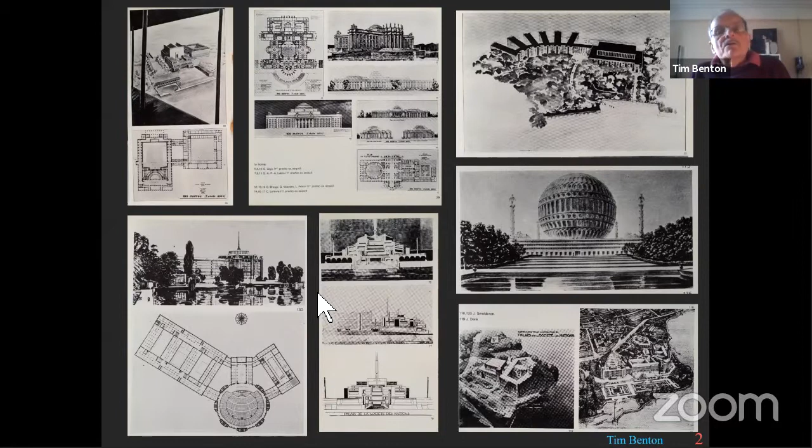But as scientists often warn us, what goes on in the petri dish of an experiment is always affected by the context. And looking at, for example, the international exhibition at Barcelona, what can you possibly say from this exhibition about the international state of architecture, except the dominant importance of the dictator Primo de Rivera in Spain, except, of course, that it was here that Mies van der Rohe designed the Barcelona Pavilion.

Nevertheless, the League of Nations competition is a more diagnostic competition than Barcelona for all sorts of reasons. Many more architects applied for it, and the League of Nations was a truly international problem. I'm going to come back to this in a little bit.

So the story can be summarized briefly. In April 1926, the League of Nations announced a competition to design a palace in Geneva to house its principal functions. A jury of 9 architects—we'll see that 9 is rather an important number in this case—and an opening date in July followed. By the closing date of 27th January 1927, 377 entries from 42 countries by over 1,000 architects had been delivered, estimated at 14 kilometers of drawings.

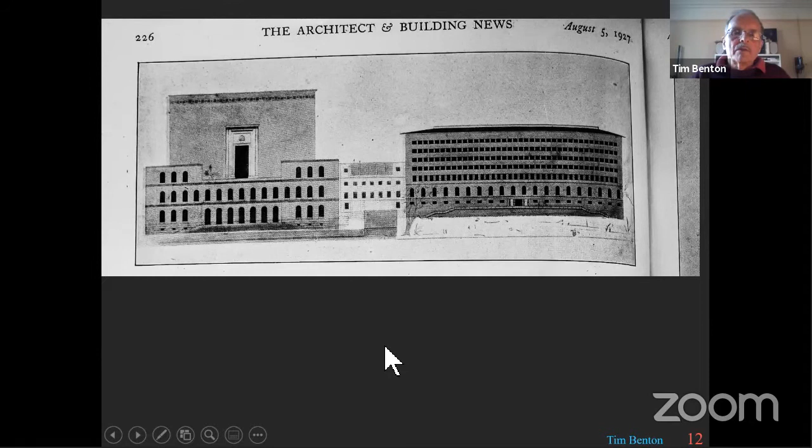And this is another building that he picked out as being international. He liked the project also because of the hierarchic differentiation of the assembly hall from the secretariat, but he particularly draws attention to this non-national quality.

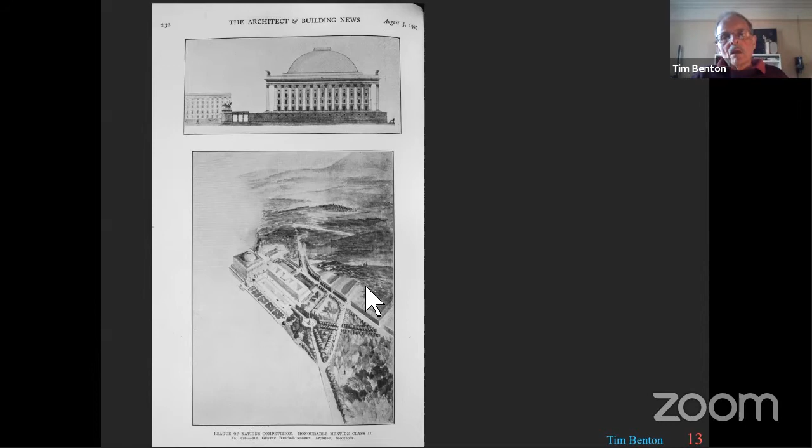So then, the site politics. The jury has certain features which were necessarily political - there had to be a British member of the jury. The British Empire and France were the two key pillars of the League of Nations. Holland was another very good reference because of the Palace of Peace and the idea of international consensus and so forth. The other countries are basically fitting in between these political necessities.

Architecturally, what we have is a group of men who, although they range in age from Berlage to Carlos Gato, did not represent what we would think of as a generation gap, certainly in terms of stylistic or architectural preferences. Berlage and Moser were the most modern of the architects, and they're two of the oldest men on the jury. Carlos Gato was one of the most conservative of the architects, although not actually, as it happens, a Beaux Arts architect particularly.

Muggia, the Italian architect, was actually considered quite an influential figure technically, because he specialized in concrete buildings. He built bridges and other concrete constructions, but his architecture was firmly in the eclectic mode.

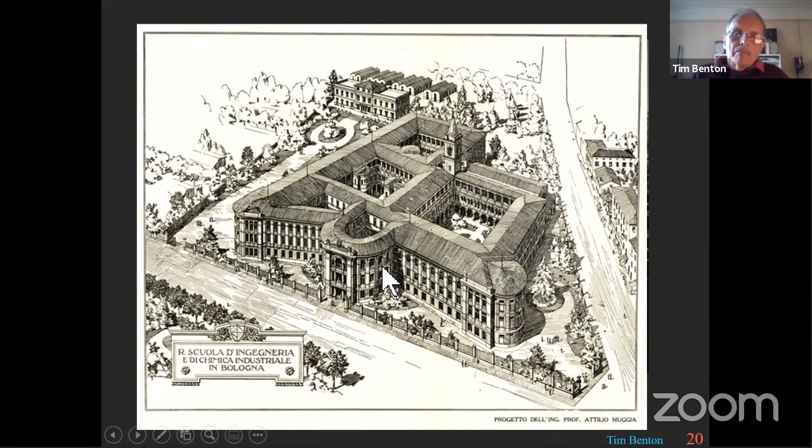And Moser was actually the most modern architect, if you like, in his actual constructions. And this is his Antonius Kirche being built at this time, the time of the jury.

And finally, Tengbom, practicing like Asplund in what the English call the Swedish Grace style of stripped classicism, here using a styler form, but otherwise extremely stripped, and very much part of the Swedish tradition.

So when finally the jury made their decision, instead of choosing one first prize and one second prize and some other mentions, they failed to do this, and they came up with 9 first prizes ex aequo, and then 9 first-class mentions and 9 second-class mentions.

And I said that 9 was a key number, and it won't have escaped you that there were 9 members of the jury. What seems to have happened - and we know this happened, because there's a correspondence between Berlage and Moser which makes it quite explicit - was that in the end, probably due to Lemaresquier's intervention, they decided the only thing to do was to give each member of the jury 1 vote for 1 project.

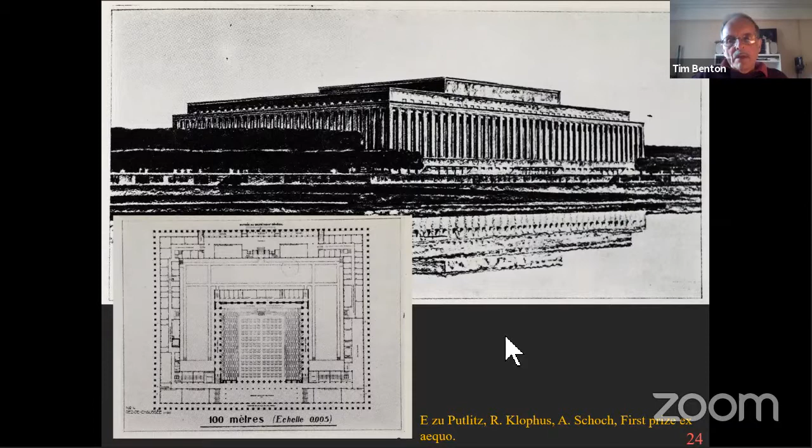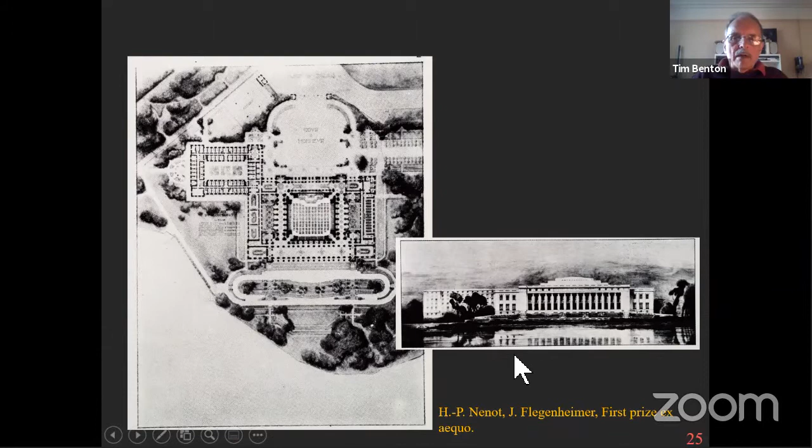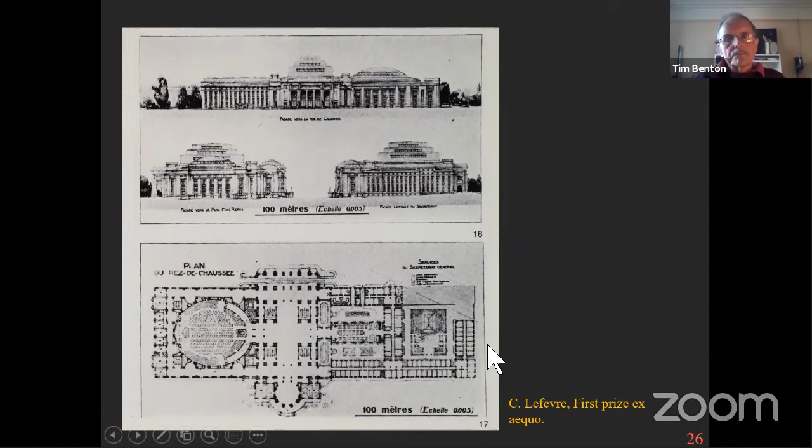Lefevre was a Beaux Arts architect, which again matches the kind of Beaux Arts criteria, but actually turned out to be one of the most expensive of the designs to build, and has a very strange feature that the main central area of the building, which you'd imagine would be the assembly hall, turns out to be a huge vestibule joining the assembly hall and the administrative areas. Then we have Labro, and Labro was Lemaresquier's student, and there's no other reason that I can imagine why it would have been chosen.

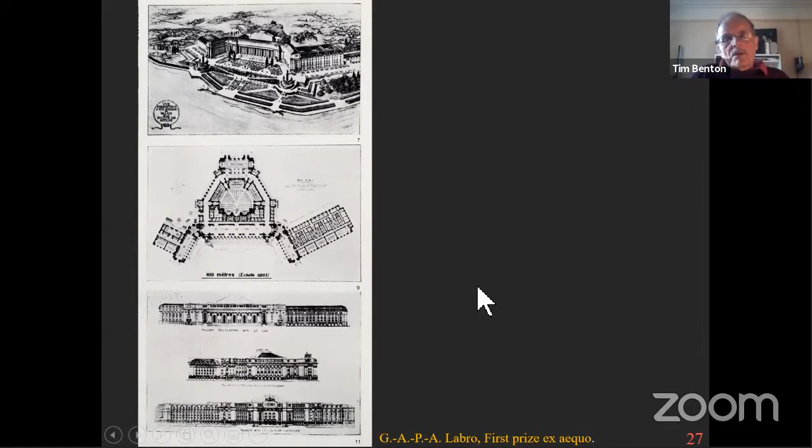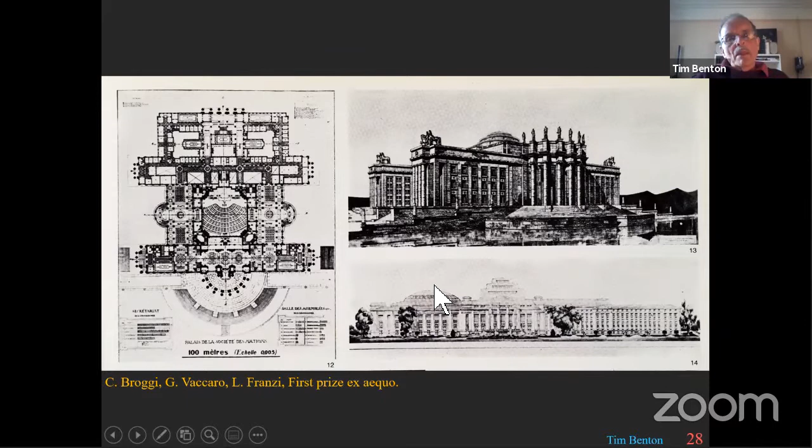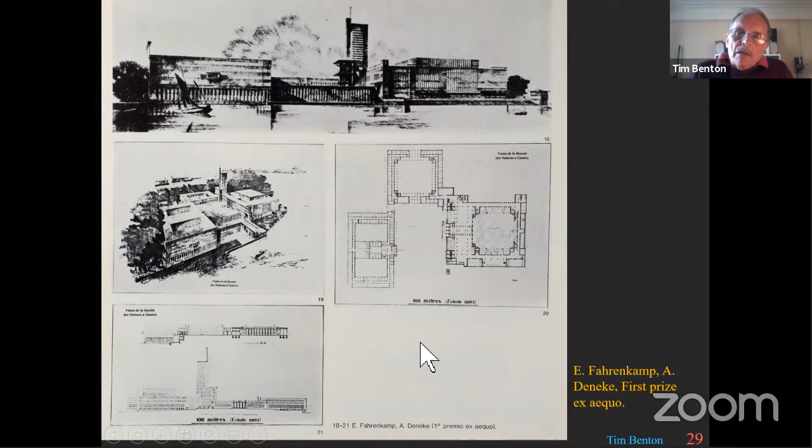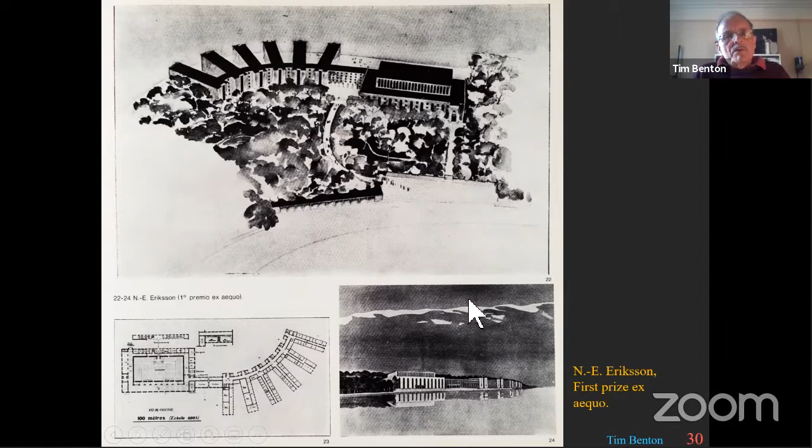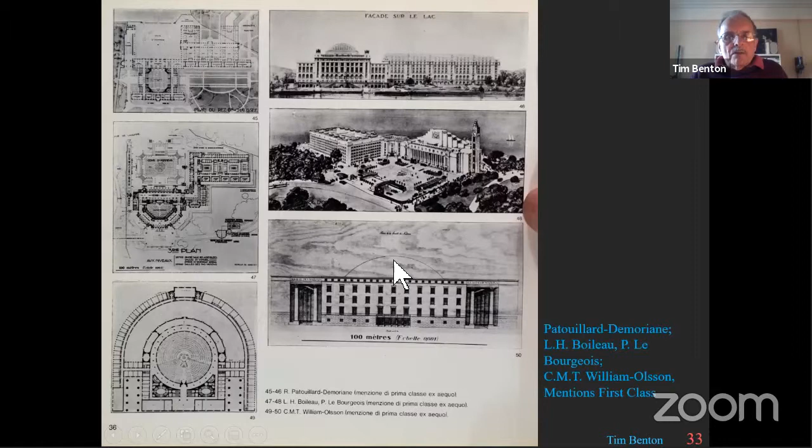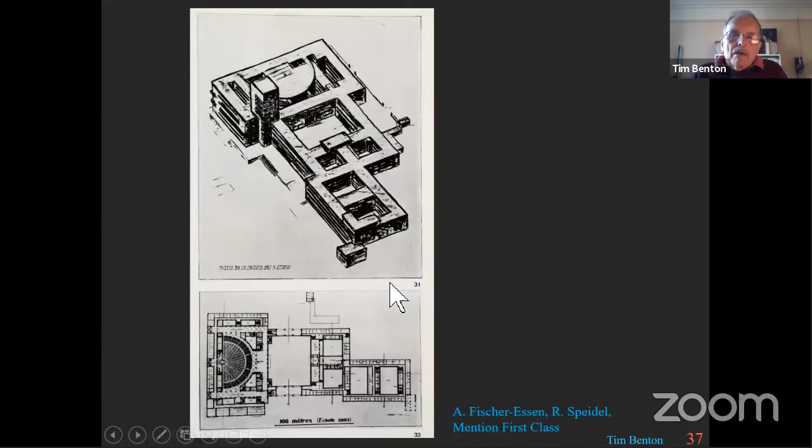And then we can do the same thing for the first class mentions. I'm going to go through these quite quickly. I'm not even going to name the architects, but you get the same idea. It's a mixture between classicism, more or less strict classicism, with the rationalist designs in the middle, and then things which are more modern. This is the second class projects now, classical or rationalist.

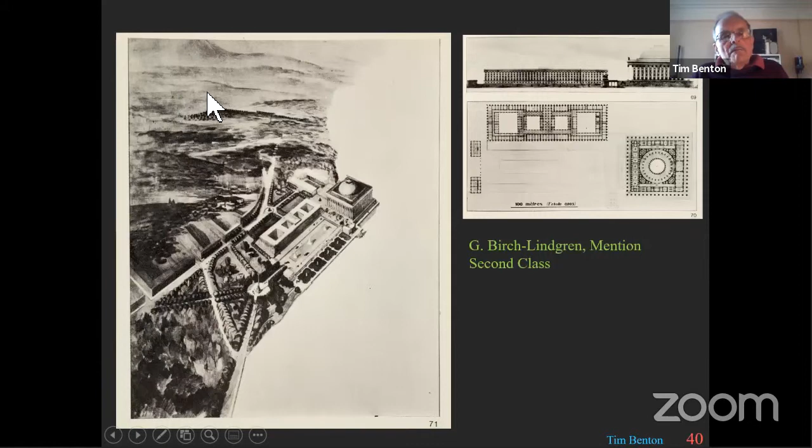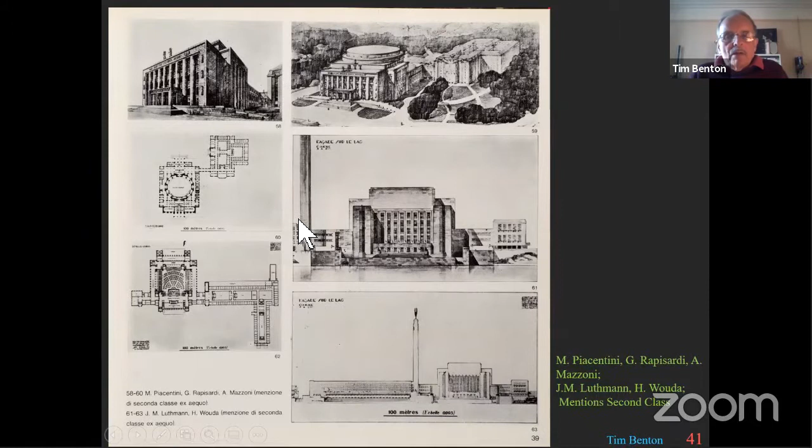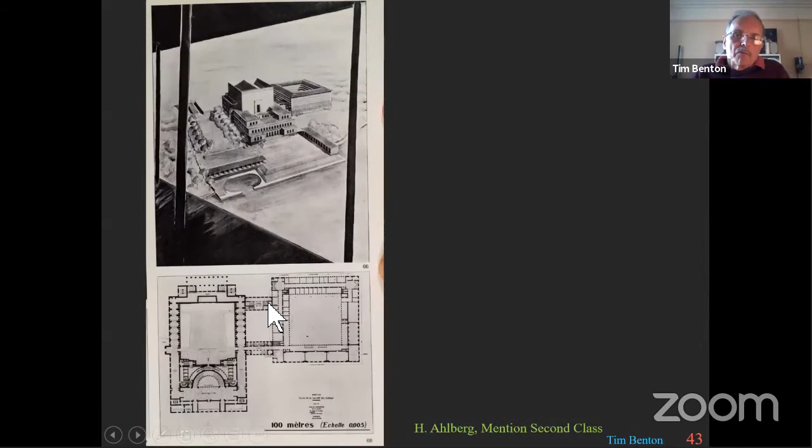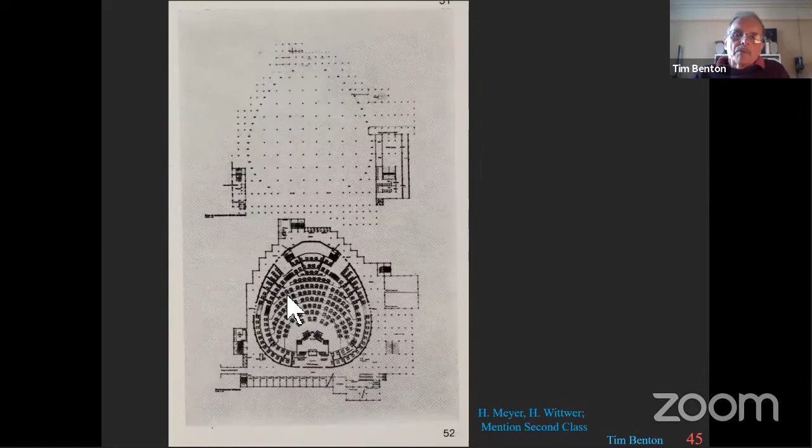And Meyer and Wittwer, who got a second class mention. Now, their project is extremely interesting because it belongs to the class of competition entry which one would say is clearly not designed to win. And this is something actually that happened to Le Corbusier, especially in the 50s and 60s. I remember talking to assistants who worked with Corbusier, who said he was desperate. They would work on a competition entry, trying to follow the rules and everything, and Le Corbusier would make sure that their design could not possibly win the competition by either making it too big, or sending it in too late, or doing something wrong.

And this is part of the whole idea, and it goes back to an earlier period, that a competition is a window to your production. It's not designed to win the competition. It's designed to show your position as an avant-garde architect. So losing a competition and getting into the architectural magazines was a good result.

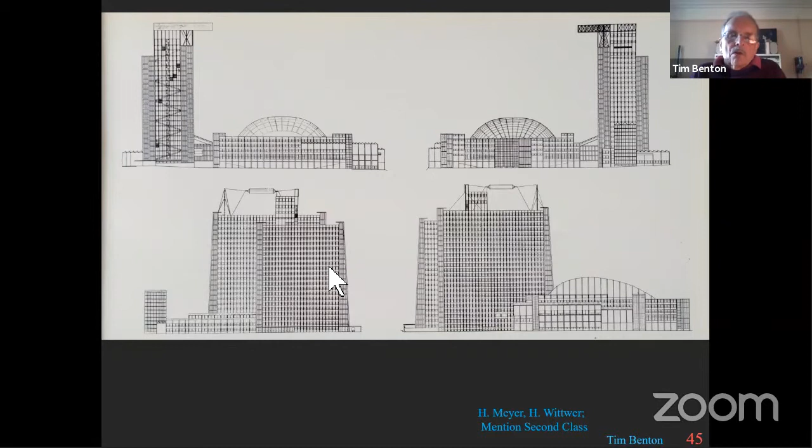So, for example, it's interesting to know why Berlage didn't choose Merkelbach, probably because this was much too office-like a building, and it didn't aim at some nobility. So one of the interesting things here in this section is to say, well, okay, they didn't agree about a lot of things. They didn't agree about style, but the jury probably did agree about some things. And one thing was, like in this case, the need for monumentality, some kind of monumentality.

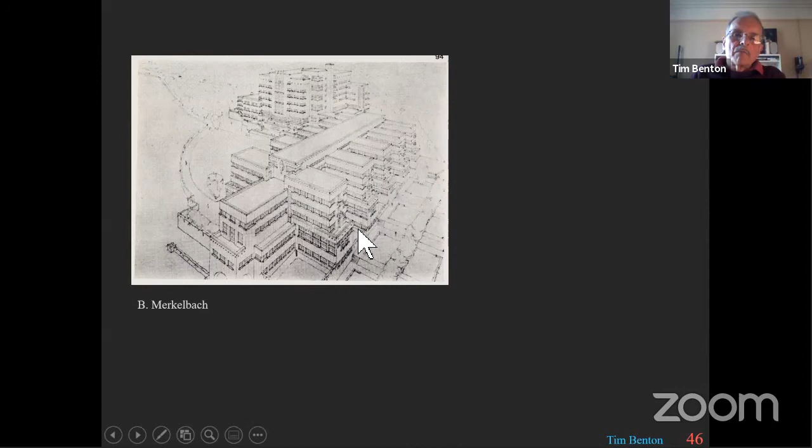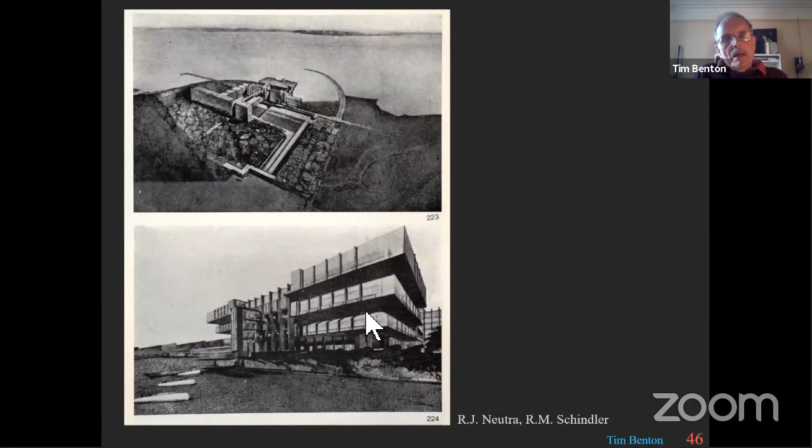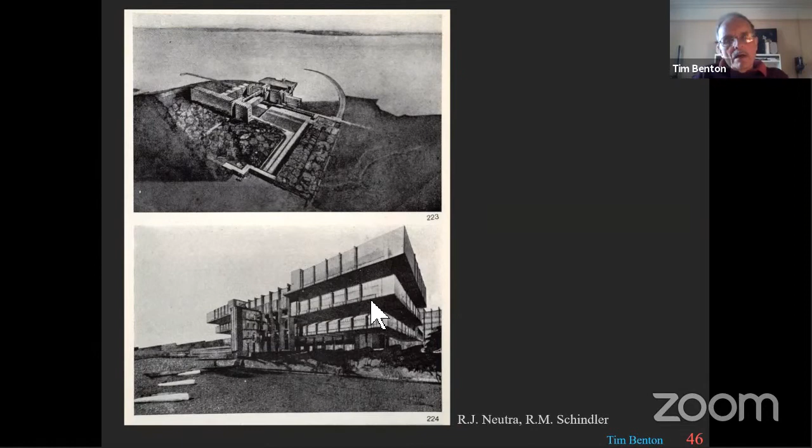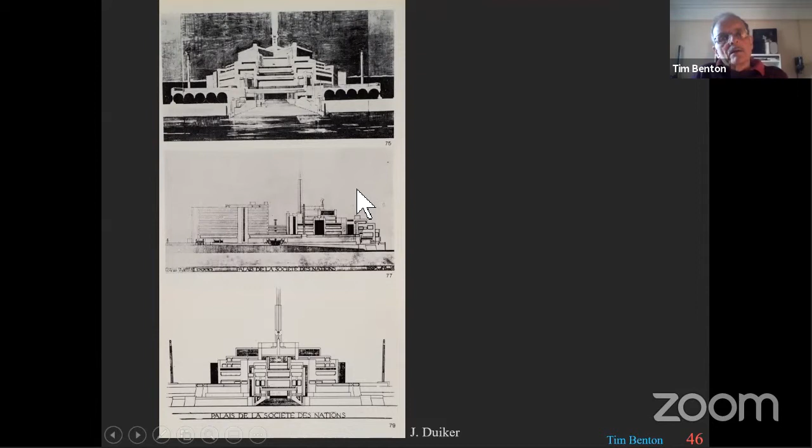And although Meyer and Wittwer get in, most of the other projects make an attempt at monumentality and some sort of international quality. Why didn't Neutra and Schindler get a mention? This is a rather brilliant design in many ways, but again, it's probably to do with the idea of monumentality and the idea of some sort of internationalness. And again, why didn't Berlage go for Duiker, whom he knew very well and worked with? This is again rather a good design, and it certainly has a monumental quality, but it's probably too dominant over the landscape and breaks too many of the rules of the competition, including preserving the trees and the view to the mountains behind.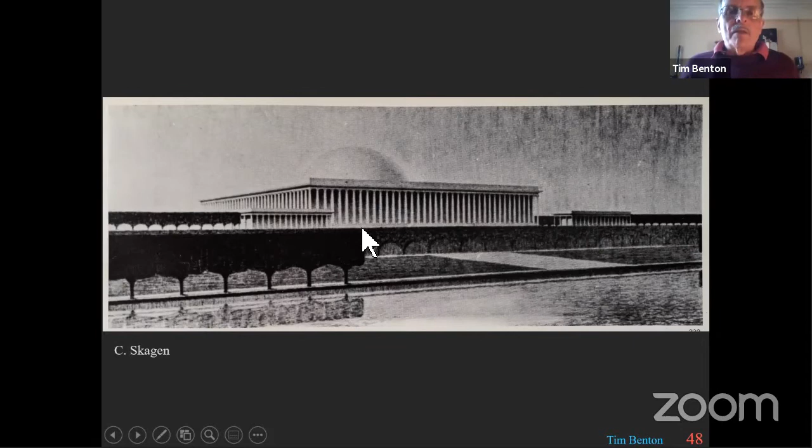So what else did the jury agree on? Well, I think one thing they agreed on, and that's why I showed that, is the old adage that you shouldn't reveal your sources too much. Eclecticism was now a bad term. And even Nénot, as we'll see later on, says that he is against the old things. So it was now no longer possible to be too historicist, to show your sources too much. So this Skagen's version of the Escorial, or the École Militaire, the Escorial more likely, with a bit of Santa Grazia Milan thrown in, is just too historicist. There's too much Hagia Sophia here, and there's too much Juvara here to be acceptable.

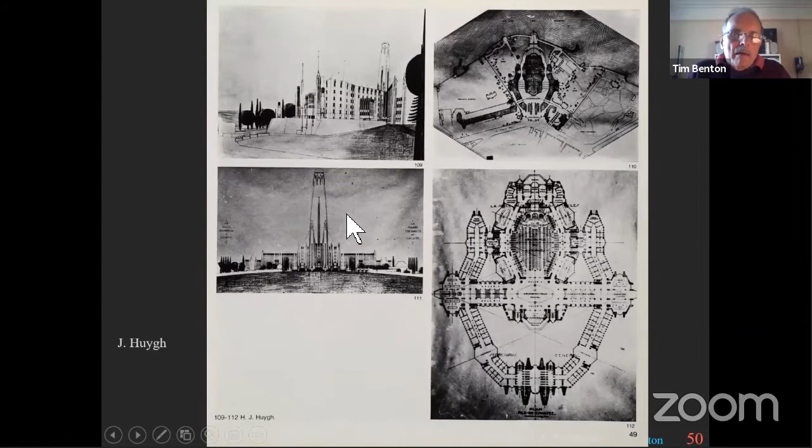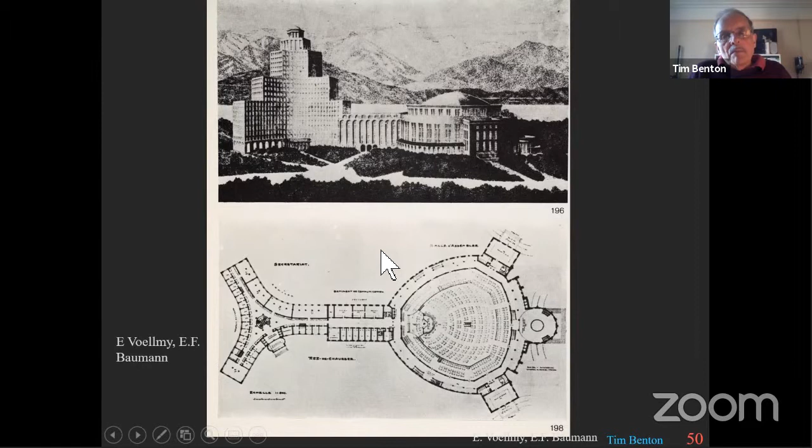Another thing they agreed on was they were all against Expressionism. So Poelzig was out. Huygh's building was out, especially for its plan, which is clearly part of a Stadtkrone type plan. They were against tall buildings, which was a clear understanding of the wishes of the people who set the program. So this project was out.

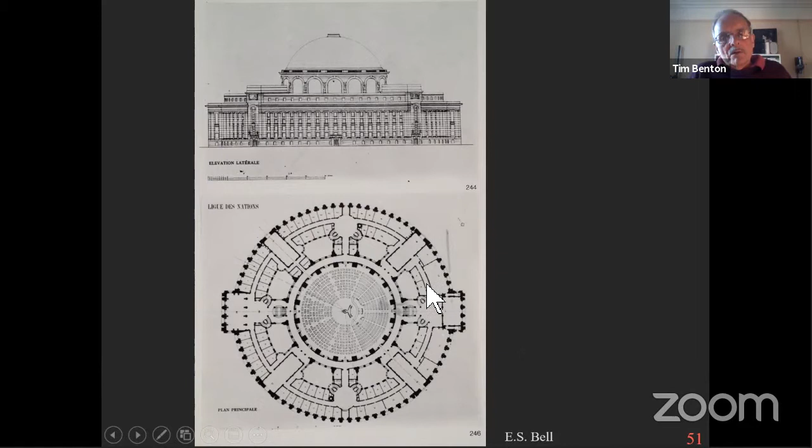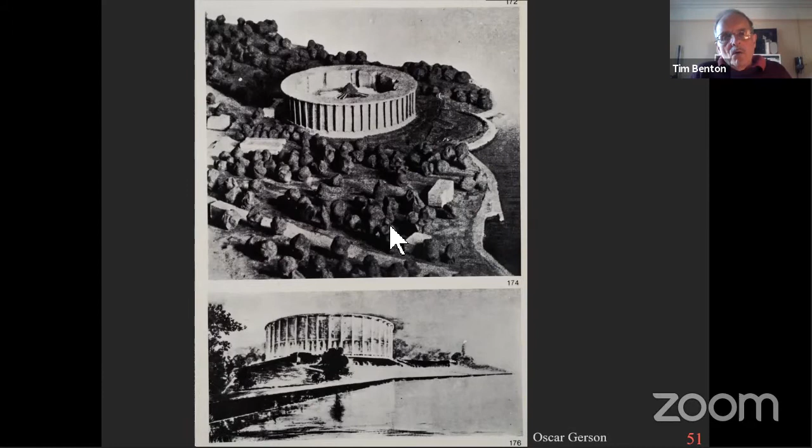And they were against too monovalent projects, like this one by the Englishman Bell, which would have created a kind of British Library reading room with all the functions of the League of Nations around it. Or this by Oscar Gerson, again a monovalent single idea into which the multiple functions of the League of Nations have to be shoehorned, or this even more so, by Birkenholz. And this again, which is a kind of version of Bruno Taut's steel building for an exhibition. This again, it's a skyscraper building, it's too American looking, and it just wouldn't have been possible.

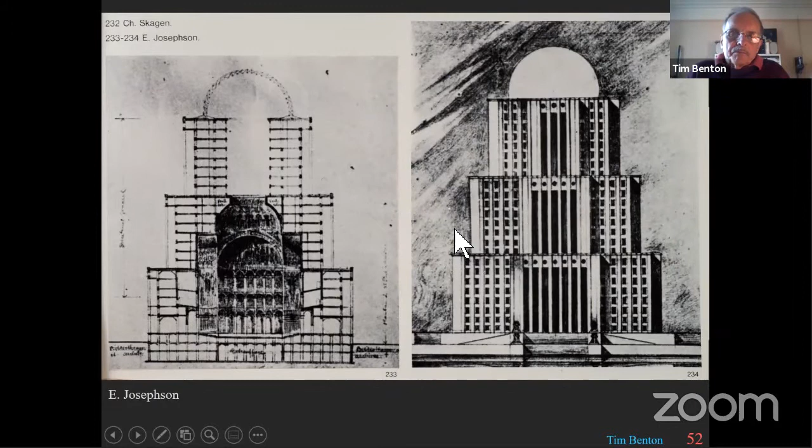So in the end, we can see that these two very different projects by Nénot and Corbusier did have a number of things in common. They respected the landscape. They made a clear hierarchical distinction between the assembly building and the secretariat. They kept a low, horizontal scale, while also aiming at monumentality, especially with the interiors. I'm not going to go into the interiors very much, but they both offered spectacular assembly halls. You can see the plan.

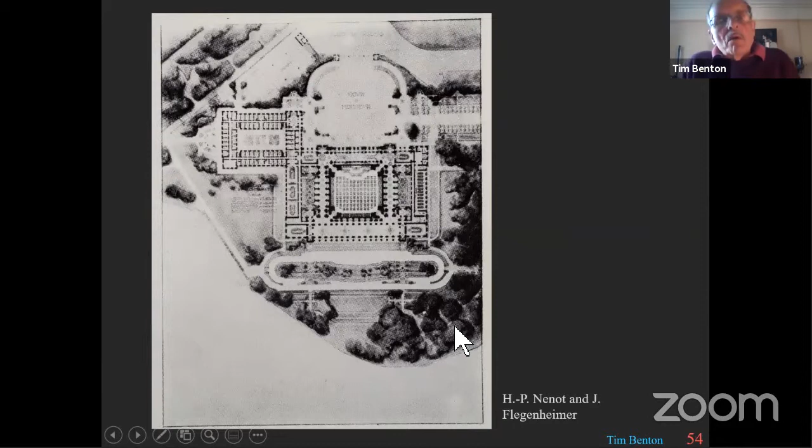So things got more complicated when the group of 5 diplomats were given their brief. And one of the things they had to do was to check the cost estimates of the different projects, of the prize-winning projects. And they did this, and the Schweizerische Bauzeitung came up with some published results.

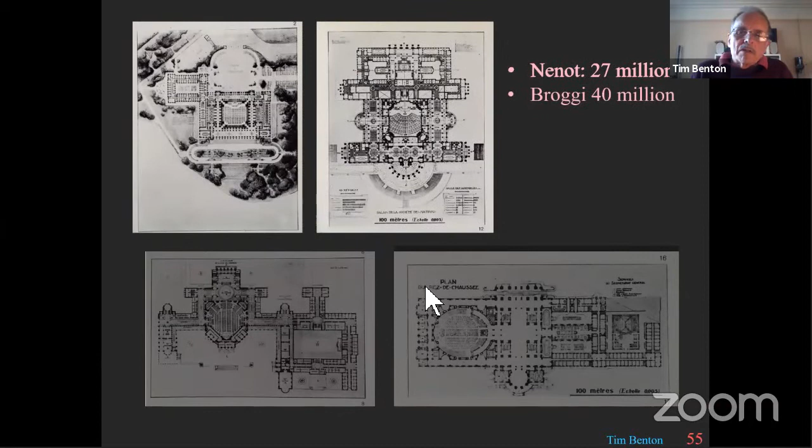So instead of the 13 million Swiss francs that the brief was supposed to have been for, Nenot would have been over twice at 27 million, Broggi at 40 million, Vago at 30 million, and Lefebvre at 50 million. And this created a big scandal in the international press, especially when the jury then proceeded to increase the budget to, surprise, surprise, 26 million. They did this partly by factoring in the sale of the Hotel National, but also just simply by adding to the budget and said it had to be built with this larger sum.

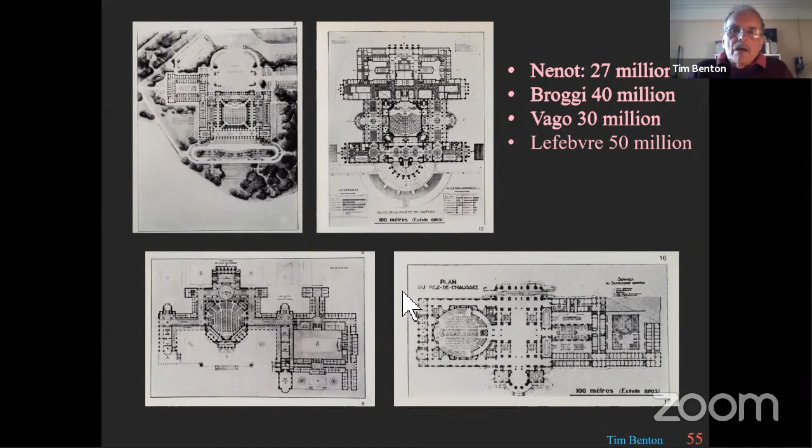Now, one of the things that becomes interesting at this point is that really from the outset, from the publication of the jury's first selection of the 9 ex aequo projects, Le Corbusier and his friends, and these in particular Siegfried Giedion, Jean Badovici in Paris, and Christian Zervos, and many others, were able to turn the discussion of the competition into an international debate about the state of architecture.

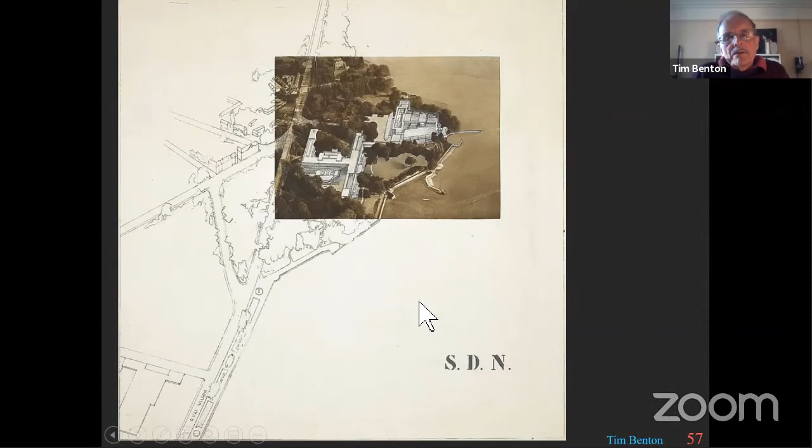And then he introduced a whole series of arguments, which, while being technical arguments in favor of his project, were also generalizable arguments about the significant ways in which modern architecture could defeat other kinds of architecture. So here we have the acoustics. Now, we know that it's a long story about Le Corbusier and Gustave Lyon, the acoustic expert in France, who designed the acoustics of the Salle Pleyel, but had also improved acoustics on a number of other buildings. I'm told, incidentally, the acoustics for the Salle Pleyel were terrible. But anyway, he had this very important reputation, and he advised Le Corbusier.

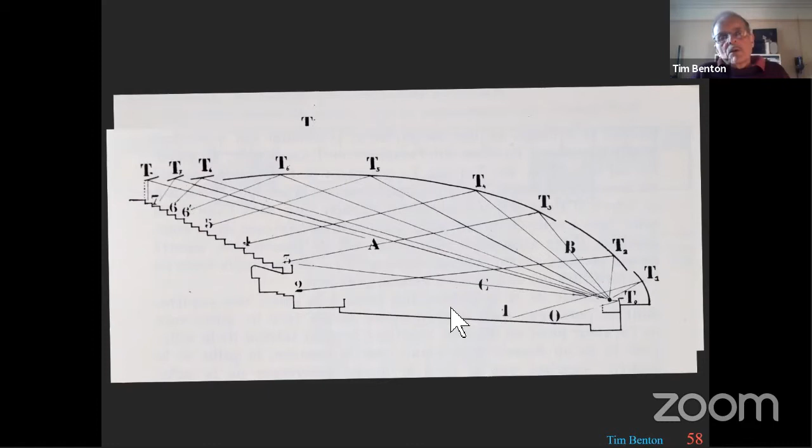Then there was a question of circulation. The brief for the League of Nations was absurd in a way. There was an assembly hall that had to be used once a year only for 2,600 people, dignitaries that would arrive in their cars. And then perhaps 3 times for council meetings, and then perhaps one other time for the BIT, the Bureau International du Travail, which was allowed to hold its big meetings there also. So there had to be this ability to absorb a huge number of vehicles and people arriving all more or less at the same time. And Le Corbusier used his pilotis to produce a great line of car parking and also a one-way system of circulation, which again, nobody had gone into this kind of detail before.

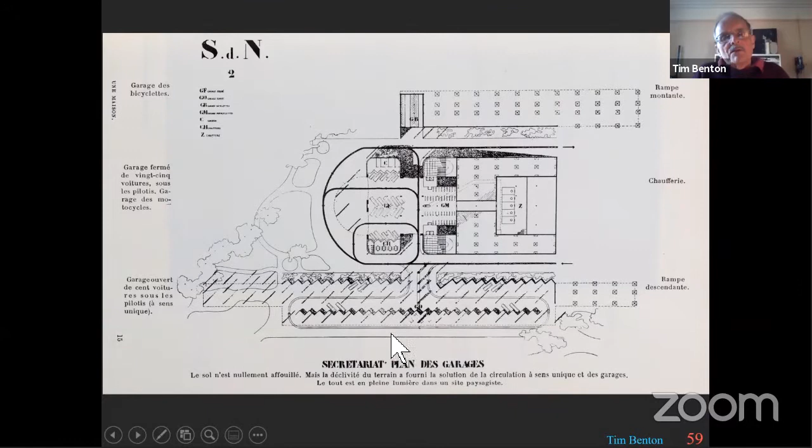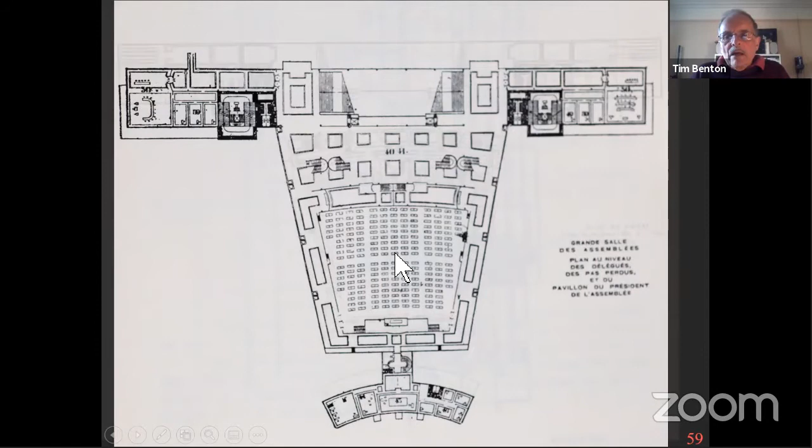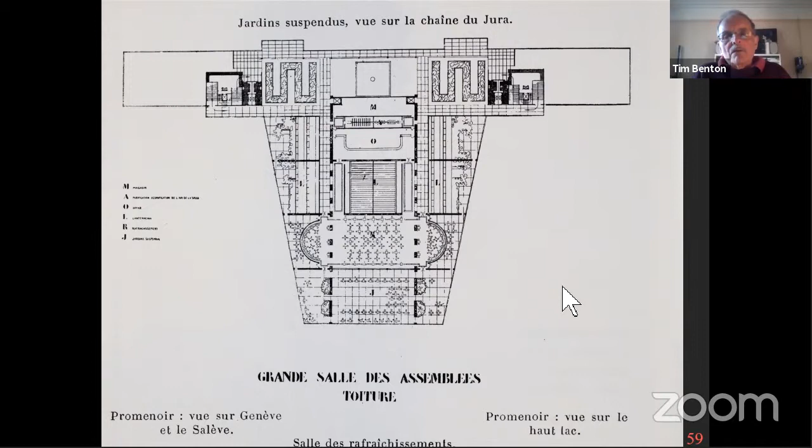The diplomats are on a different level, and they also have access to the High Commission rooms, which were placed alongside. And all this led up to the roof garden, where there was a restaurant. There were views, magnificent views, both ways across the lake and across to the hills and so forth. Again, this human aspect of the use of the building had not been developed, and certainly wasn't developed rhetorically by any of the other competitors.

And then there's the whole thing about heating. He claimed to have solved the problem of heating with this mur neutralisant, this big cavity wall lined in beautiful cast glass panels, which would have let in the diffused light, lots of light, but also kept the place warm in winter, with this idea of pumping hot air in between the two panes of glass, which we know probably would never have worked, but that was his argument.

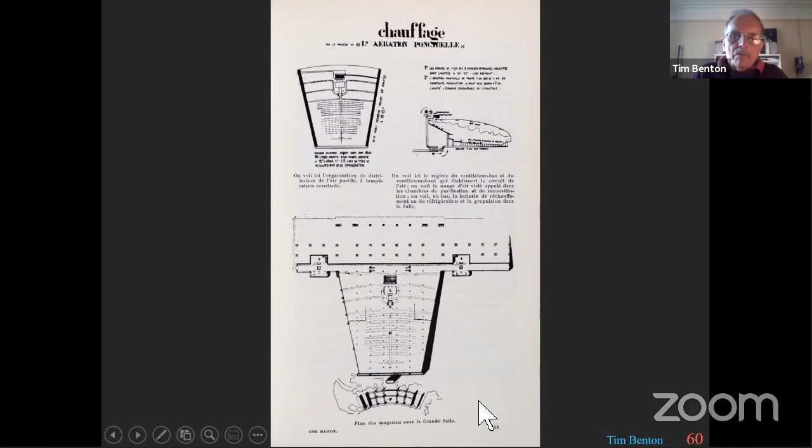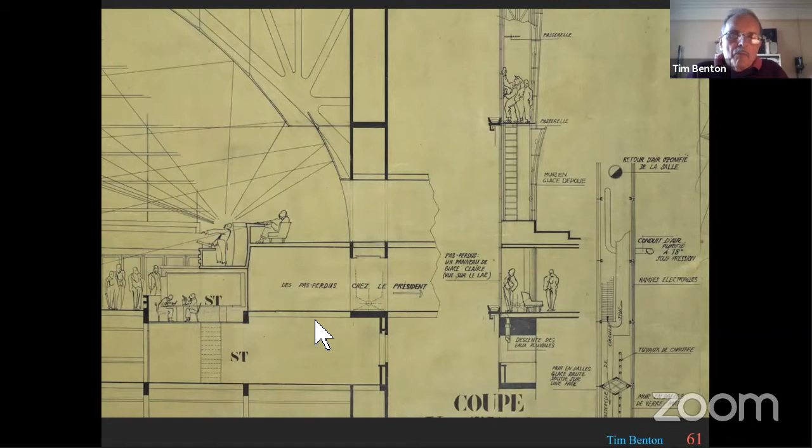But above all, his competition designs are funny, they're human. They invite the visitor in to imagine the work of the workman cleaning the windows, for example, of the orators. As Ken Frampton says, you can imagine a portrait of Le Corbusier speaking and of Perret sitting down. Yeah, you can see this, you can imagine these kind of caricatures of people. Or here the comic figures of the international diplomats.

And this, which I take to be Le Corbusier himself and Madame de Mandrot in sort of characteristic poses. These sketches are, I'm certain, by Pierre Jeanneret, who had a kind of comic style of drawing, which we see in a number of his drawings. And incidentally, you can see here in this detail the technique that Pierre Jeanneret used of producing this spray effect with a toothbrush to give the rendering of the blue light.

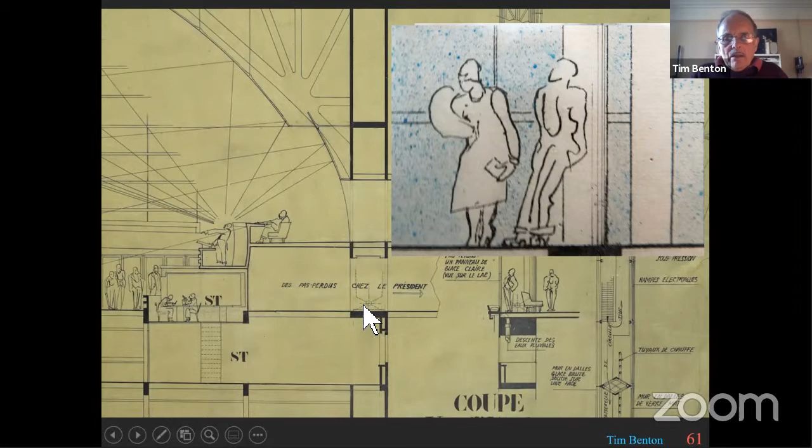And again, the humanity of it, the fact that the life of the Secretariat was seen as people standing, looking out over the view, having a garden where they could move around, and having the trees, and all this sort of putting the spectator into the space was just going deeper into the psychology, if you like, of not just the cultural critic, but above all, the public critic.

And it's interesting that he was so confident in the power of his renderings that he was able, in this caption in Une Maison, un Palais, to just give a quote, a hostile quote: it's a factory, people say, this isn't architecture. He can put that and feel certain that anybody looking at the drawing will not agree.

What's interesting, of course, about visual rhetoric is that it often doesn't work. I mean, many people looking at this would see a factory, just like many people looking at the Villa Savoye see it, or saw it, as a factory or some sort of impersonal construction, a building, not architecture.

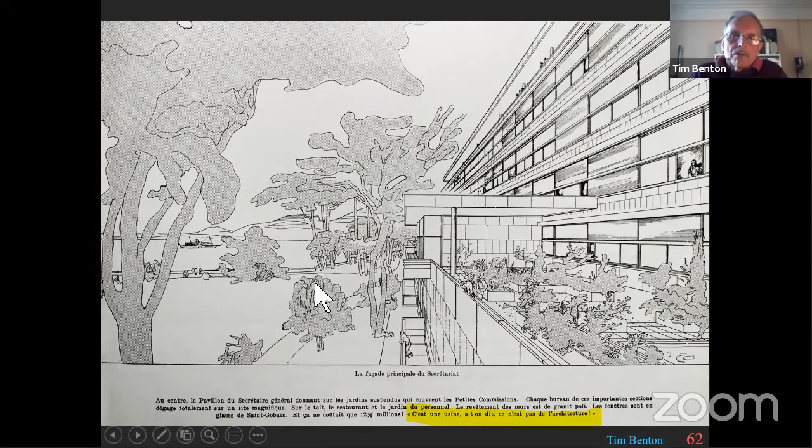And Corbusier steps over the line in modernist terms towards the monumental. Ken Frampton discusses this, and I think quite wrongly, incidentally, I'm sorry, Ken, this is not a crow, this is an eagle. And he sees this as, well, I'm not going to go into his analysis. I have two possible analyses of this system.

On the one hand, it's a play on the living animals of the prophet Ezekiel, which were also the symbols, the icons used for the four evangelists. If you turn the ox into a horse, we have the four evangelists. But I rather think that it's something else. I think it's the three ages of the antique. And here I agree with Ken that the man and the horse do look a bit like the Roman Dioscuri. And then the lion of Venice and the eagle of America. I think this could be the three ages of architecture.

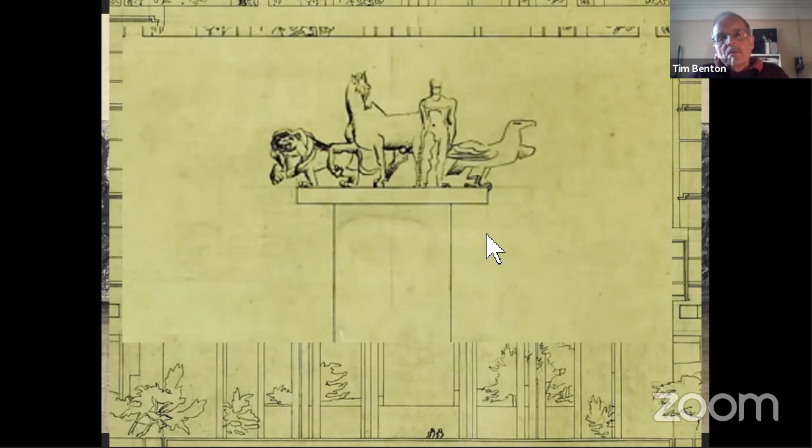But anyway, what's important about it is that it's speaking a non-functionalist language. It's presenting the idea, which is called for in the brief, in the program for the League of Nations project, that it must symbolize world harmony. And either through the Christian metaphor or through the metaphor of history, this is, I think, Corbusier trying to suggest that, as he always said, everything I do is based on the past, but also everything I do is based on man, universal man.

Then, of course, there's the wonderful way that Corbusier's rhetoric works in Une Maison, un Palais. He tries to, I think pretty successfully, separate out completely the ancient and the modern, to make the distinction between himself and Nénot absolute, between the old and the new, between the dead and the living.

So here, des voix d'outre-tombe. This is actually based on a piece of journalism about the wireless, but des voix d'outre-tombe, the way you read it is that this is the voice of the dead. This is a séance with the dead of the past coming together in the Beaux Arts schemes.

So the debate, as it took place in Switzerland and across the world, can be divided into four, if you like, strands. The various expressions of nationalist sentiment, an attack on the jury for failing to carry out its mission, the consolidation of the criticisms by the traditionalists of modern architecture, and the consolidation and temporary unification of the progressives around Le Corbusier's project.

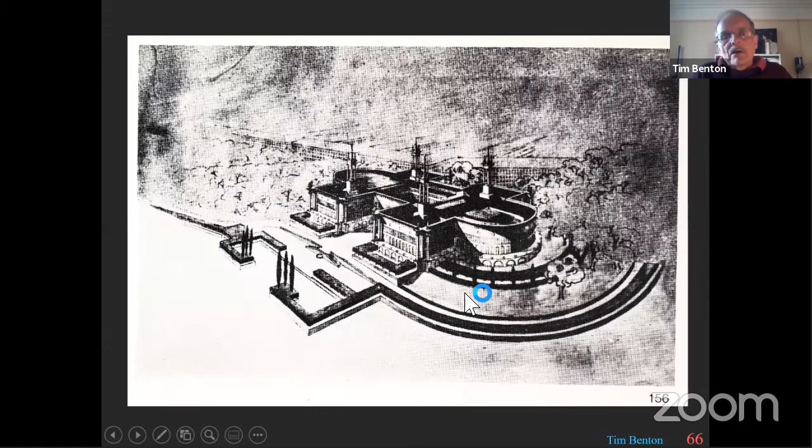It's interesting that this scheme by Alexander von Senger, which was a scheme that wasn't given a mention, von Senger used the debate around the League of Nations to fire up, if you like, his very violent polemic against Le Corbusier, the cheval de Troie du Bolchevisme and the Brandfackel Moskaus. So on the right, if you like, the nationalist argument was that modern architecture was Soviet, communist, and therefore had to be resented.

And it's interesting how Nénot himself was interviewed in, I think it was July 1927, very quickly comes out and says, no, this is a victory for art against barbarity. And he says, let me explain, sorry, I'll go back to this paragraph here.

Le Corbusier, he says, claimed that his, Nénot's, project was sadistic, but as for me, I'm not going to say anything bad about his project. I've been practicing architecture for 60 years and I understand nothing about his project. Please explain it to me if you can. I can't explain it. No, these people are barbarians. Pretty hard words. It's interesting that also in this way he's presenting himself as a kind of nice guy, obviously.

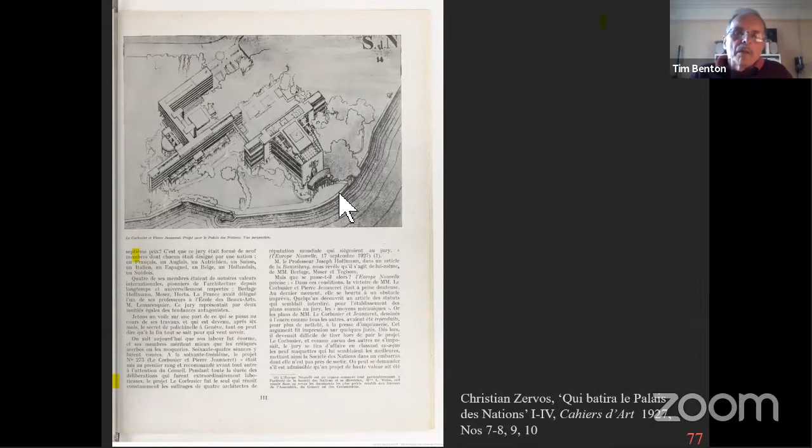In his arguments, he is the one who gives most publicity to this idea, this myth perhaps, that at the 63rd meeting, Le Corbusier's project had the unanimous support, or had a majority support in the jury, and was only defeated because of Lemaresquier, signifying that it was printed and not done in China ink.

And he quotes the Europe Nouvelle. Now, Europe Nouvelle is interesting because it was edited by Mademoiselle Weiss, and we know from Corbusier's diary that Le Corbusier had several meetings with Mademoiselle Weiss. So if she—nobody seems to have published this thing, and I haven't found it in Europe Nouvelle, but it almost certainly came from Le Corbusier himself.

Zervos also does a big job of drawing together international people, statements from international people in support of Le Corbusier's project. And he sets up a questionnaire which he sends to all sorts of people.

And it's here where people who are probably quite divided in their opinion in the jury process, for example Hoffmann, as I said before, were able to come out and say they supported Corbusier's scheme, whereas they almost certainly hadn't in the jury.

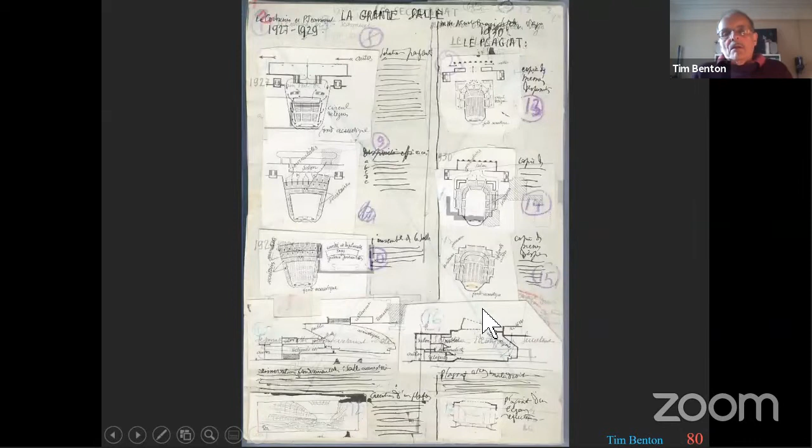He then followed this up later on with another petition in which he claimed plagiarism, and he claimed over 1 million Swiss francs of compensation for loss of earnings and for the work he put into it.

So the building that was built was a long way from any of the original projects, it's true. As I said before, we have to accept it as a modern building—you couldn't imagine this building being built in the 1880s.

It's technically modern, and it's just an example of many authoritarian buildings—buildings of authority, I should say—built in every country in the world.